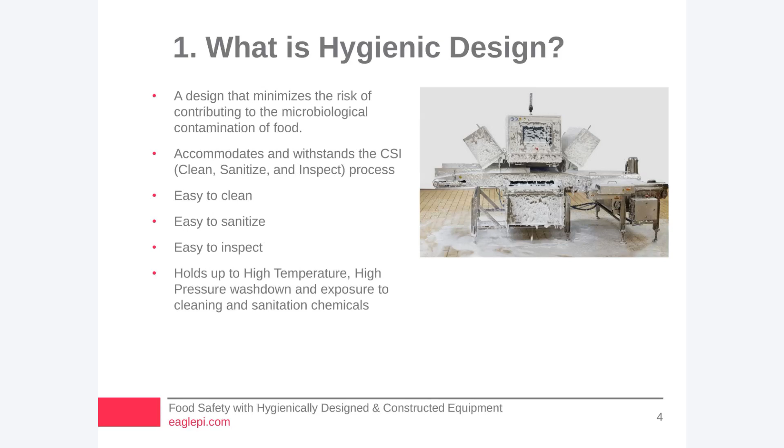So why is hygienic design so important? First of all, there's significant human costs associated with foodborne illnesses. About 1 in 6 people in the United States get sick every year, and it's estimated that over 3,000 people die annually in the U.S. That's a significant number, and I certainly don't want to be associated with or feel like I did something that contributed to someone dying or even getting someone sick, and I'm sure most other people feel the same way.

But to go along with that, there's significant financial costs also. It's estimated approximately 15 million pounds of product were recalled in 2021, and that's a significant cost to go along with that. It's estimated that every recall costs about $10 million, which is a very significant amount of money for our processors. It goes right to the bottom line. And a good hygienic design can have a strong effect on minimizing these risks.

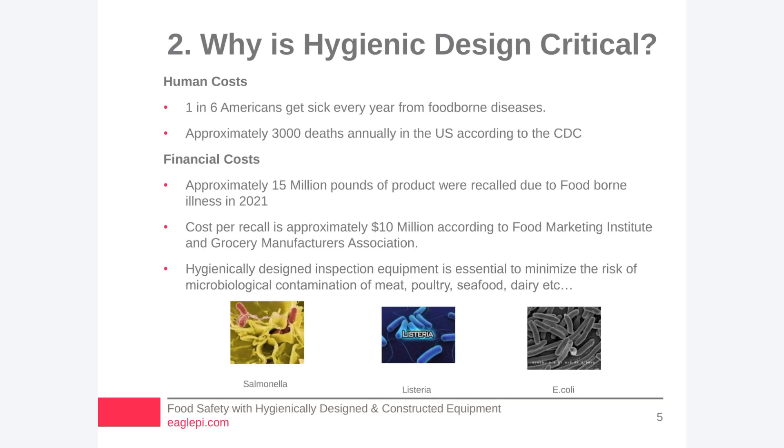You also have EHEDG. EHEDG is an agency in Europe that actually sets standards for hygienic design and also certifies equipment for hygienic design.

Here in the United States, we have the FDA. The FDA has a big effect on the materials that we can use for food contact. It also has the USDA under their umbrella. And the USDA actually has federal inspectors in every meat and poultry plant here in the US, and they have a lot of say-so on what goes on as far as the equipment used. They have the ability to prevent production from starting if they're not happy with the condition of everything after sanitation's finished, or if they're concerned about a piece of equipment in the line.

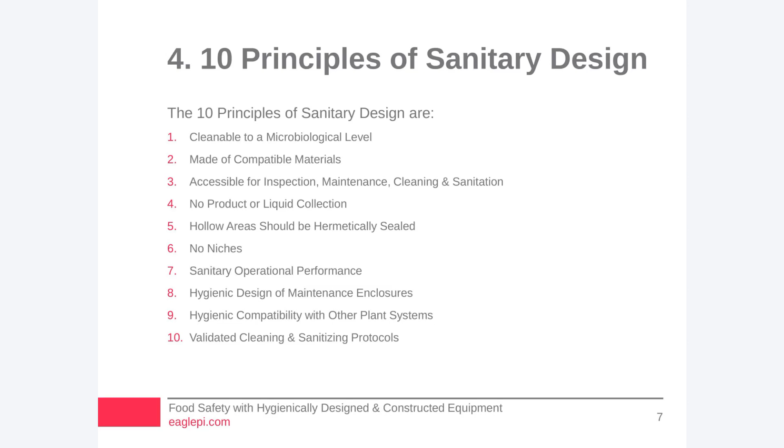So the first is the equipment needs to be cleanable to a microbiological level. The equipment has to be constructed in such a way that it's easy to clean. If it's not easy to clean, then it's less likely to get cleaned, or much more difficult to remove all of the potential hazards. The surfaces really need to be accessible for mechanical cleaning, mostly so they can be easily sprayed down during the wash down process without getting in there with a lot of other tools or brushes or anything to accomplish it. You really just want to be able to hit it with a high pressure spray and get all the contaminants off the equipment.

And you also want it to be clean. You want to be able to tell if it's clean based on sight, touch, and smell. You want to be able to look at it, to see all surfaces, so you can see if there's anything left in there. If you touch it, you want to be sure that there's nothing slimy or greasy on the surface. And then obviously, if you smell something bad, there's probably something somewhere that needs to be removed.

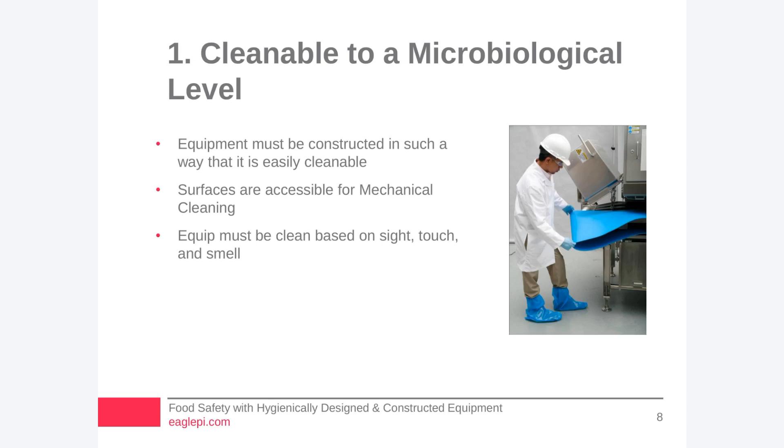The equipment needs to be made of compatible materials. Materials need to be corrosion resistant, non-toxic, and non-absorbent, per FDA requirements for food contact. One of the most common materials for this environment is 300 series stainless, which has very good corrosion resistance, with 304 being the most common. In meat and poultry plants, you see a lot of 300 series stainless around.

For plastics, very common ones are UHMW, HDPE, and acetal. These materials all have good mechanical properties and hold up well to the chemical exposure encountered in these environments. When it comes to belting, for seamless belting, polyurethane works very well. Some polyurethane belting has reinforcement in it and may require edge sealing to make sure the reinforcement isn't exposed, or it needs to be cut in such a way that the reinforcement doesn't get exposed when it's cut.

One of the things we really want to avoid is coatings, platings, or paint, that sort of thing. It tends to chip off and can get in the food, so this is something we really want to avoid when it comes to hygienic design. And all this stuff needs to be able to withstand exposure to cleaning and sanitation chemicals. There are a lot of caustic and acidic chemicals that can have detrimental effects on components if they're not made out of the right materials.

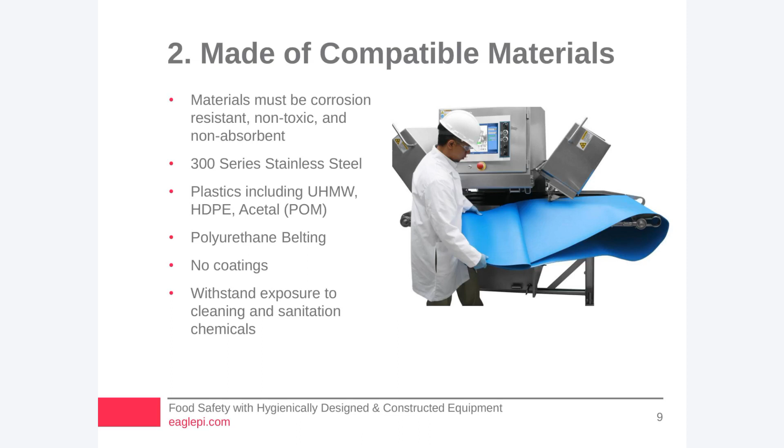Everything also needs to be very accessible for inspection, maintenance, cleaning, and sanitation. The surfaces should be readily accessible, and ultimately it shouldn't require any tools to disassemble the equipment. With X-ray, there is an FDA requirement that a tool has to be required to open it up for radiological safety, so that kind of trumps this standard. But nevertheless, it's just a flathead screwdriver that's required, and it's quick and easy.

You can see in the photo on the right, they're removing the belt. This particular machine can be broken down for the washdown process in about 3 minutes or so, so it's fairly quick and easy. You also want to have a storage location for your COP parts - these are the parts you remove for cleaning. You don't want to leave them laying around on the floor where they can get damaged or dirty and become unsanitary. So the customer should either have some kind of rack for the parts, or a parts cart can be purchased.

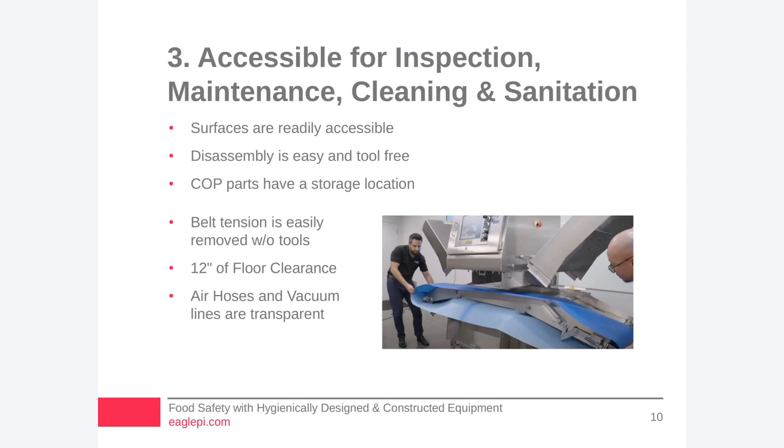Principle number 4 is we don't want to have any liquid collection on the equipment. You can see in the photo of the machine on the right that there are very few flat surfaces. Even the surfaces that look close to flat have a few degrees of draft on them, and this prevents water from pooling up there. Some of the other surfaces, for example the framework, are at an even steeper angle, and the primary reason for this is to prevent product from building up when it drops from the food zone.

One other very important aspect is that we don't want any of the parts to be able to drip, drain, or draw product into the product zones. Basically any parts that are above the product zone need to be of hygienic design, or they need to prevent the product from getting to the product zone.

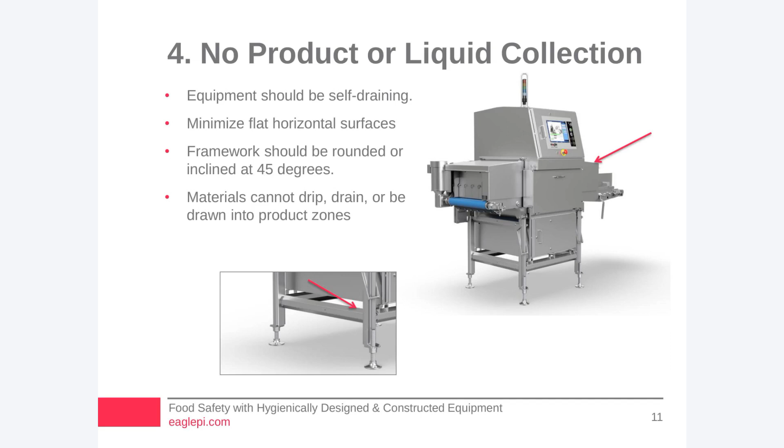Principle number 5 is hollow areas should be eliminated or hermetically sealed. Best case, we eliminate the hollow sections. We really want to avoid the use of hollow sections whenever possible, and don't use them unless they're absolutely necessary. The reason for this is, the hollow sections, even if they're hermetically sealed...

It's possible, through welding or whatever process, that the seal isn't perfect, and then through the thermal cycling that goes on in the plant during washdown and production, it draws air in, pushes air back out, and along with that air can be water or bacteria or whatever other contaminants causing problems. It also creates an area where bacteria can grow because there's no way to get in there to clean it or stop it from growing. So when air does get pushed back out, it pushes some of that nasty stuff back out with it, potentially contaminating the food.

If you do have any hollow tubes, you obviously don't want to have any fastener penetrations into there, because that creates a path for the microbes to get inside.

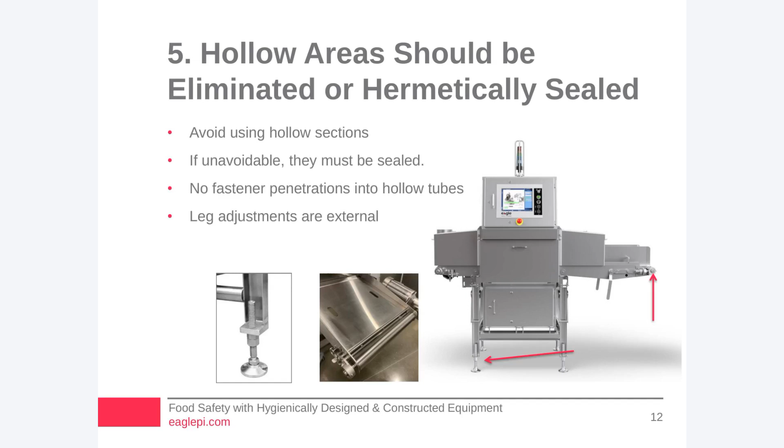Principle number 6 is no niches.

All of the standards have a surface finish requirement for hygienic products, and they're all 32 micro-inch RA for the food contact surfaces. This is 0.8 micrometers RA for metric, and those numbers match up identically when you do the conversion. For non-contact surfaces, it's 125 micro-inch, so it's a little more coarse, but nevertheless there's still a requirement there.

The welds need to be continuous and smooth. We don't want to have any pinholes or inclusions where bacteria can get in there and we can't clean it out. Internal corners need to have a minimum 1/8 inch internal radius, so food cannot get stuck into those corners and prevent it from being easily cleaned out during the washdown process.

Another very important part of this principle is that fasteners should not be used in or above the product zone. The standards do actually allow for use of fasteners in the product zone, but it's preferred that it's avoided for a couple of reasons. First, fasteners can fall out and get into the product, so if you do have a fastener in there, you need some kind of locking mechanism to make sure it won't fall out.

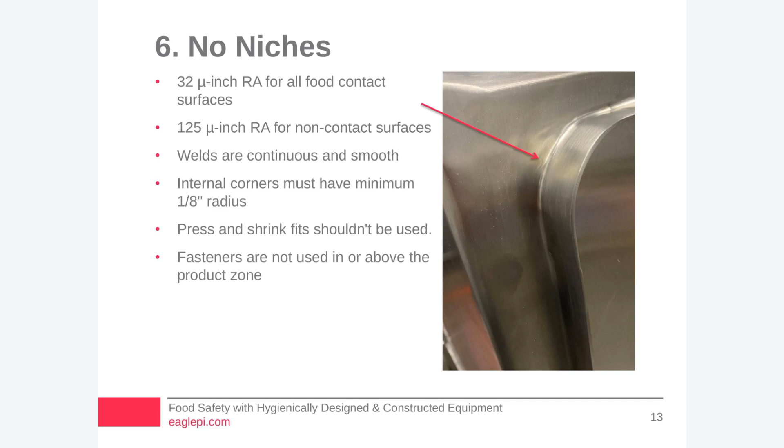Principle number 7, operational performance. We want to keep the control panel in a place where it's not above the product zone. The control panel gets touched and gets dirty, and we don't want any liquids to be able to run from the control panel and drip into the product zone, so we don't want to have it directly above it.

We don't want to use compressed air on products unless it's dried and filtered. There are some fairly stringent filtering requirements if you want to have compressed air actually contacting unpackaged product.

We want to keep motors and bearings outside of the product zone. The bearings, just because of their nature, are not as hygienic as we'd like them to be for something used in the product zone, and the same goes for the motors.

You can see in the picture on the left that we have the motor outside the product zone with a few inches between it and the belt, and also a barrier in between. The equipment should also be built to minimize product buildup, so try to avoid flat horizontal surfaces wherever you can.

The hygienic design of maintenance enclosures is very important. We don't want to have maintenance enclosures in or above the product zone. One very important point here is that they need to be able to withstand the washdown environment.

When it comes to enclosures, we frequently talk about the IP rating, or the ingress protection rating. IP69 is kind of the gold standard with IP ratings. I think when it comes to hygienic design, it's kind of a starting point — with some equipment that maybe doesn't get hit as hard during the washdown process, an IP69 rating may be sufficient.

In my experience, the products that get hit hard with washdown need an additional level of protection above and beyond what IP69 provides. The IP69 test requires the spray nozzle for the water to be 4 to 6 inches away from whatever surface you're testing, and what we've found in the meat and poultry plants, primarily in the US, is that they'll get right on the surfaces you're trying to seal up.

When you're doing testing for IP69 or for ingress protection, you really want to get the nozzle right on those surfaces and make sure that you don't get any penetration inside the cabinet.

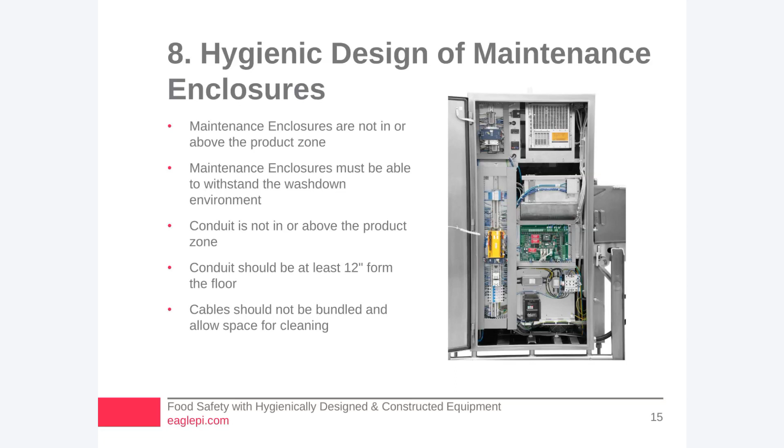Principle number 9 is compatibility with other plant systems. We want to make sure that the pneumatics are not exhausting into the food zone, because the air can be contaminated. We want to make sure that the fan cooled motors are not blowing air toward the product zone, because again, that air can be contaminated.

You can see in the picture to the right that we have the motor outside of the food zone and a barrier in between that prevents the air from transferring in that direction.

Any specific biological risks associated with the piece of equipment should be identified, so the plant knows that they need to pay special attention to that area. And we also want to make sure that ducts drain away from the product zone. We don't want to have any contaminated water dripping into the product zone.

Another thing is AC units. This particular machine you see in the picture has an AC unit on the back, and the AC unit exhausts in a direction that's pointed away from the product zone.

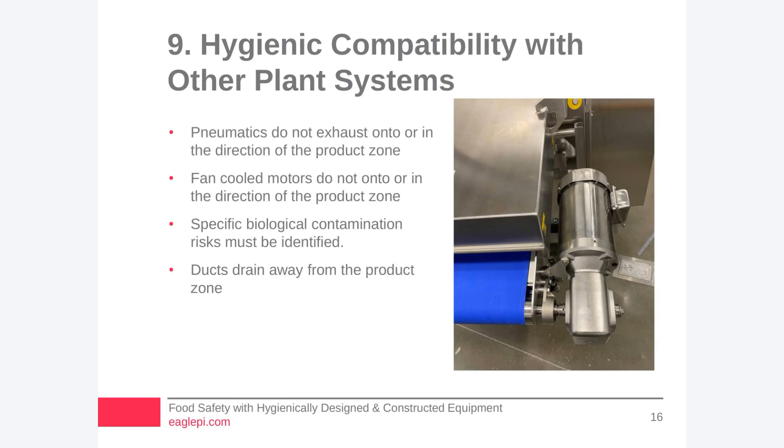We also need to validate the cleaning and sanitizing protocols. First of all, the sanitary design process really needs to start at the beginning of the development process with the equipment. What we found is that when you address this early on in the development process, it's a lot easier to accomplish your objective with the design than it is when you consider it later on and have to try to make concepts work that are already kind of settled, such as getting fasteners outside the food zone.

If you start from the beginning saying we're not going to have any fasteners in the food zone, it's a lot easier to accomplish than when you start thinking about it when you're 3/4 of the way through the design.

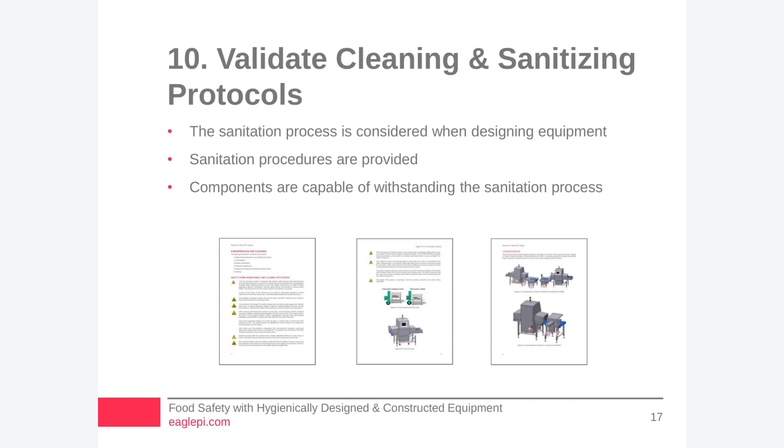Sanitation procedures need to be provided, and those are typically provided in the user manual for the machine. And again, all the components need to be capable of withstanding the sanitation process.

So, in conclusion, hygienic design can have a huge impact on consumers and processors in avoiding and preventing people from getting sick. It needs to be considered at the very beginning of the design process when you want to develop a piece of equipment used in this environment.

All the worldwide standards are very similar. Designing for one of the standards probably puts you in pretty good shape for compliance with the rest of the standards. But if you are developing global equipment, you want to consider all of the standards early on to make sure that you're in compliance with all of them.

And finally, designing for the environment, particularly the washdown environment and the exposure to the cleaning and sanitation chemicals, is very important for the machine.

If it's not designed for that, the machine's going to end up creating a lot of problems for everybody, not only for the customer in the form of downtime, but also for the manufacturer in terms of warranty and reputation. So we really want to make sure that we do a good job of designing it for this environment.

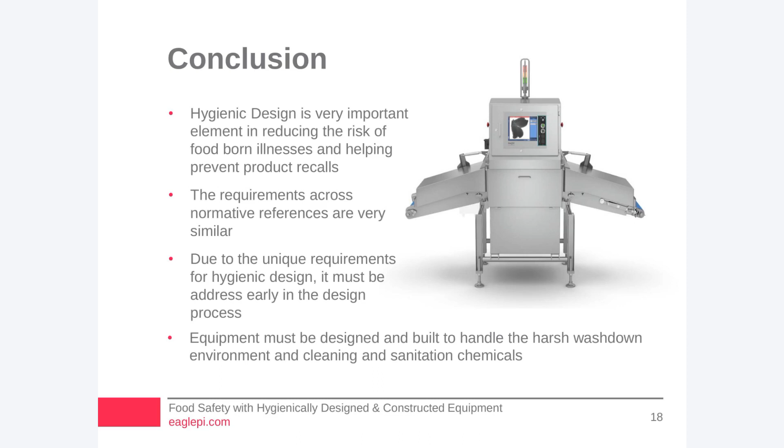That's great, Mike. Thank you very much. If you can switch your webcam back on, and then we'll get to the questions. Yeah, it was really great. Lots of. Thank you. Yeah, let me just get rid of those. Yeah, lots of great practical tips, along with the photographs that highlight it even more. So excellent, and often overlooked things.